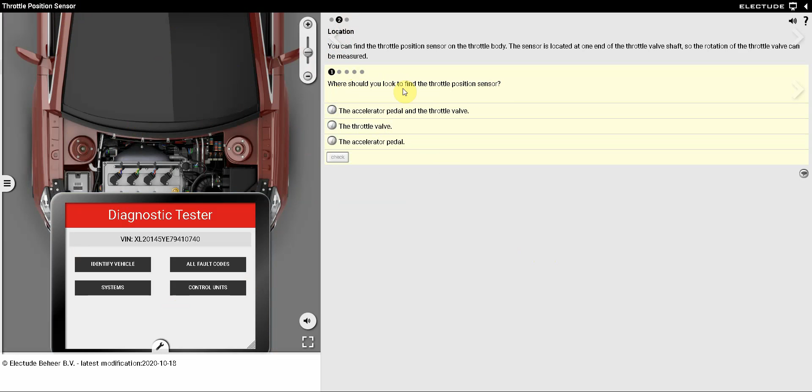So you may get questions like where should you look to find the throttle position sensor, or it could ask you to indicate the throttle control module assembly diagram. All that stuff, you need this information over here. Same with this one and this one, and right down to the last one where it's actually asking you for the component.

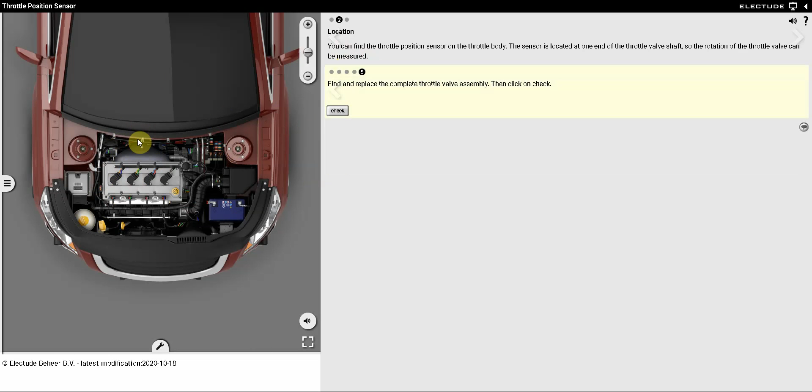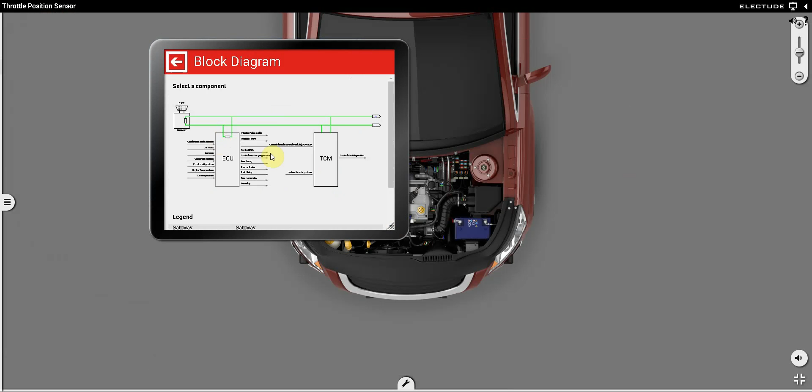So here, what we're really looking for on this screen, you can look at it the way it's split, but of course it's kind of hard to see. If I'm here and I want to see this larger, I go down to the bottom where I can go to full screen, and it will do this for me. I can drag this around wherever I want, and I can also make it bigger so I can see what I need to see. If I go to the back, it's going to take me back to the wiring diagram and a block diagram, depending on what I'm looking for, but I was on the block diagram.

If I need more information, some of the questions may ask you to do other things. But up in the right corner, I can maximize or make my vehicle bigger. Over on the far side here, I have a menu where I can choose instrument cluster, and from here I can use this to start the vehicle. I have a check engine light on—as you can see, it's out now.

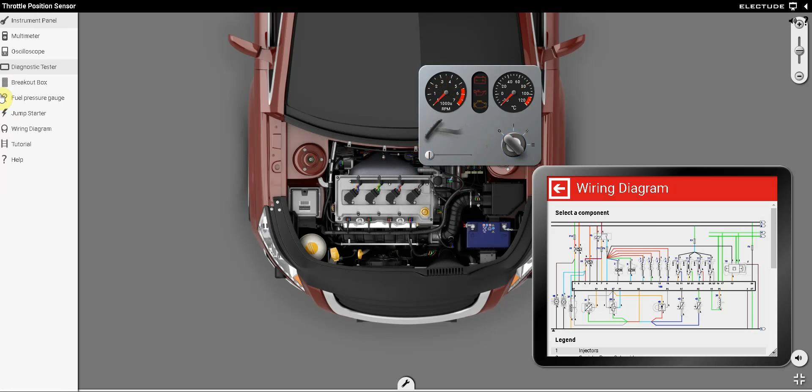I can use this slider to start up the engine, and I can turn it off. I also have a multimeter I can use, and I have an oscilloscope. I have a diagnostic tester, which you just put there—let's turn it off. Breakout box, you can see right here. I have a fuel pressure gauge if I want to check fuel, and if my battery gets low, I have a booster.

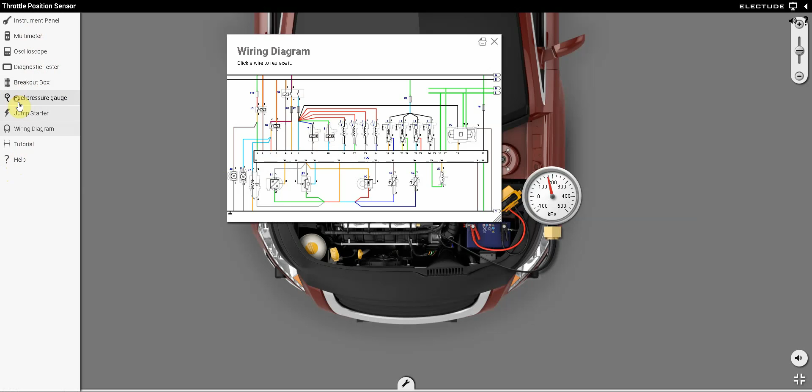And then again, I can go back to my wiring diagram alone or back to where I was originally with the diagnosis. I also have an area here called tutorial, which will actually explain everything I'm kind of explaining now in plus more detail. I just thought I'd do a quick one with you here.

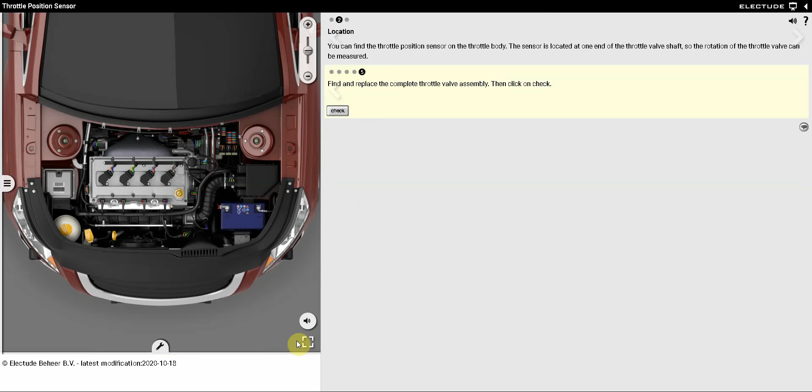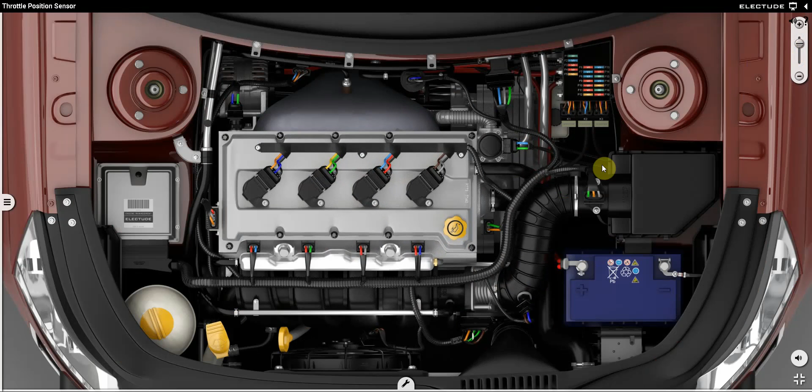Okay, so if I minimize back here again, and I go back to my last question where it asks me to replace a component—find and replace the throttle position, throttle valve assembly—to do that part you'll see down here it says drag remove part here. And if I open this box, I need to find my component. I do have ways to find that here, but for this one I'll just show you how to do it. So if I go bigger, the question was it wanted me to replace my throttle position valve, or throttle valve.

So this is kind of procedural—you need to do it in order. You can see this glowing, how it glows when I roll over top of it. See, they glow—that just means I can service those components. See, all the connectors are there and they glow. This is my throttle valve. If I disconnect it, like so, then I can connect that again, and you can see how I took it out. I can drop it down here to my removed part, but I need to replace it.

It won't allow me to replace it. If I click on it, it says replace this part. I have to say yes. It turns yellow—when it turns yellow, it means I've taken the old part and received a new one. I take my yellow component, place it back in, shut the switch off, and then when I go back to here now, I can check to make sure it was done correctly.

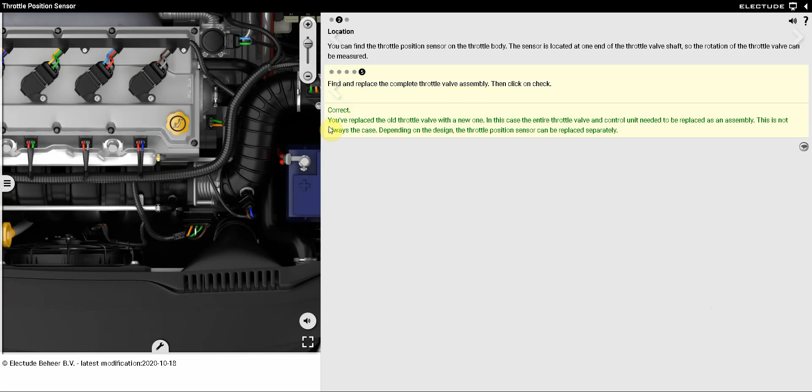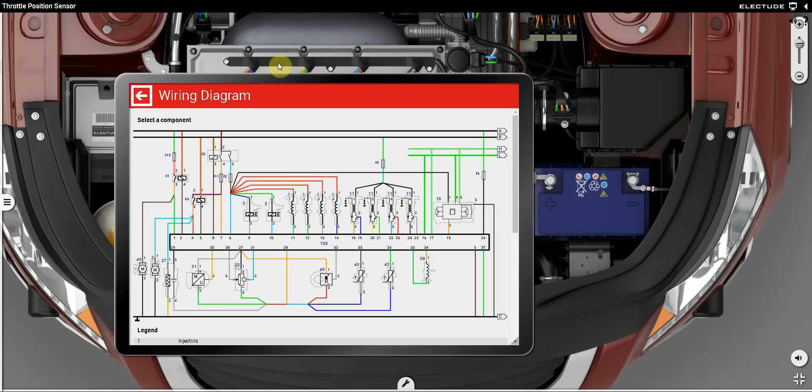If I go back to this question here, where I was earlier, it asks me to look at something in the diagram: which pin of the engine control unit is pin 2 of the TCM. Again, I can't see that, it's pretty small. If I make it bigger, I can make this diagram much larger, as large as I need to. Then I can look at my diagram knowing that my TCM is right here, and then I have pin 15 right there.

So if I minimize this again, if I just minimize it, it's going to keep this quite large, which doesn't matter at this point. I can minimize it, answer the question, and move on.

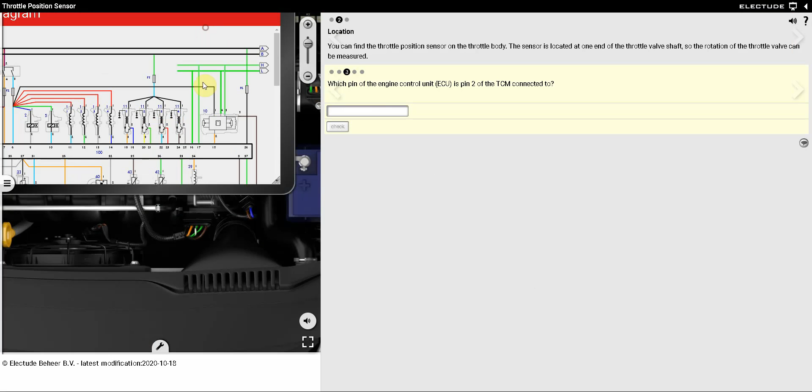That's just it—you may have to play around a little bit to understand how this works better with all this stuff in here, but as you use it, it gets better, easier to use. That's all there is to it.